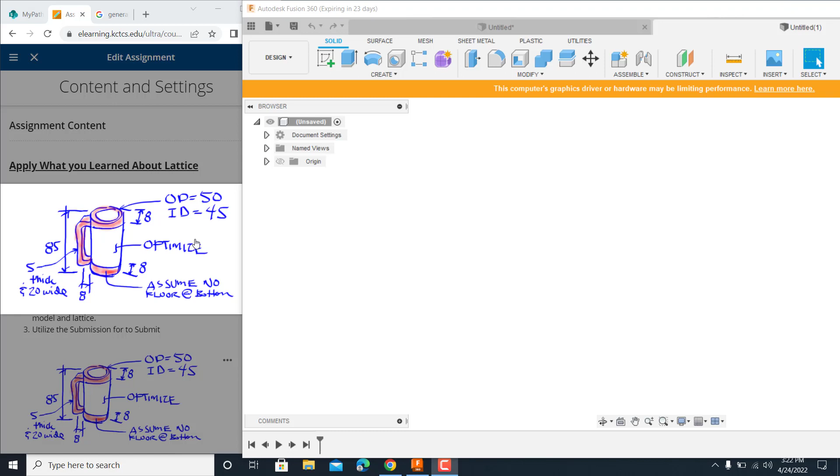Welcome back, everybody. In this lesson we are going to create this holder and design a lattice inside of it. First thing, we're going to make the holder, make this first and then we'll make the lattice as a separate component like we did in our previous lesson.

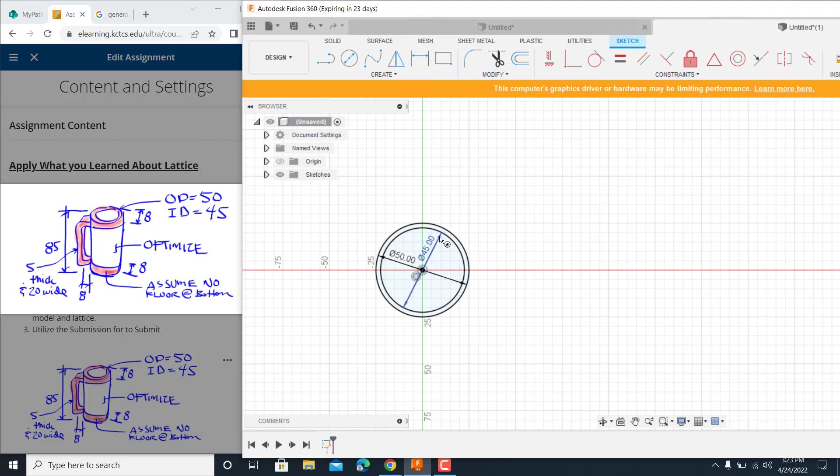So let's start this out. We'll do this video and then I'll make a video to show you how to do the lattice. There's a couple little tricks to that, but first thing I do is just start out, and this thing's 50 OD, outside diameter.

Inside of this thing is 45, so we'll get that in there, 45, and then finish the sketch out. I want to extrude this thing out, and looks like it's 8 millimeters. So we got that one done.

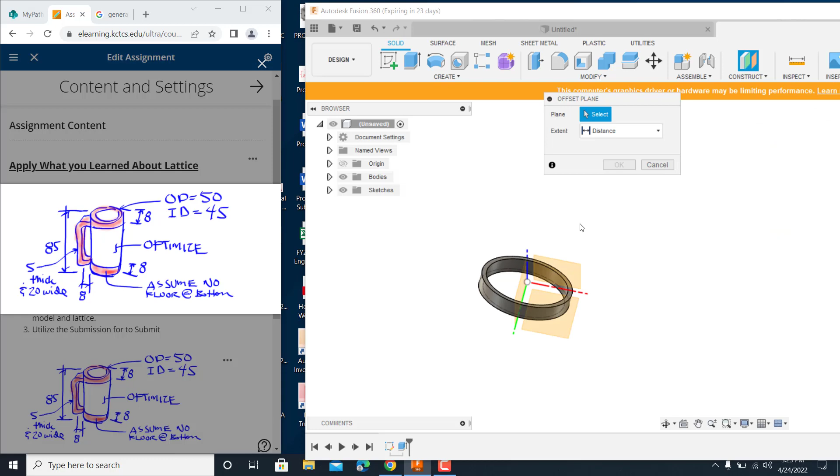Now I want to go ahead and make myself a plane up here. Construct, offset plane. I'll come up here and touch right on the face of that one. I'll go backwards, or I could have went forward, it doesn't matter. So from here, I need to go all the way from here, 85 from the top to the bottom. So whichever direction I'm going, minus 85 is it.

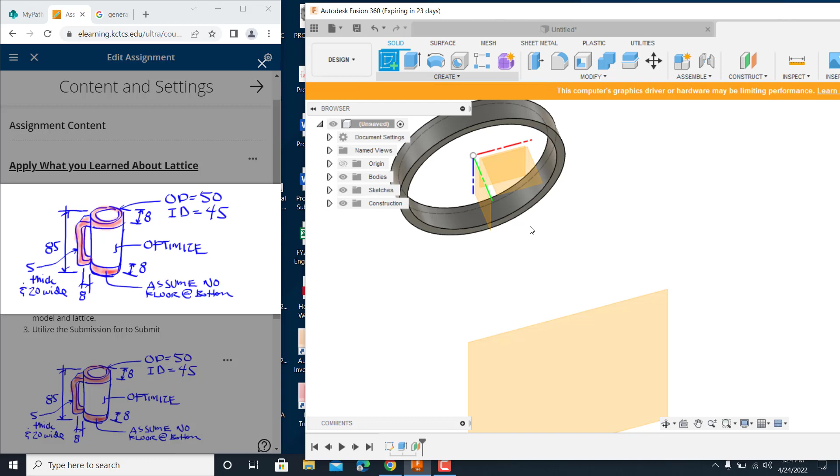Now I'm going to take and put this on that. I want to go to project geometry, catch that, and I should have caught both of them. And I hit OK on that. That was from here to here, so all I have to do is make sure that you understand where you're at, which side you need to extrude to. Right click.

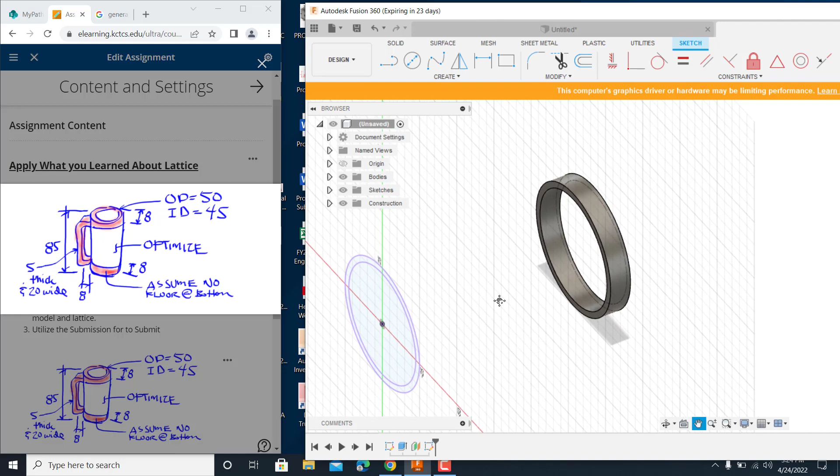I want to pull this over here, finish sketch, and come back in here, minimize that so we can see our drawing. Extrude this one back 8 millimeters as well. Just like that, we've got that put together.

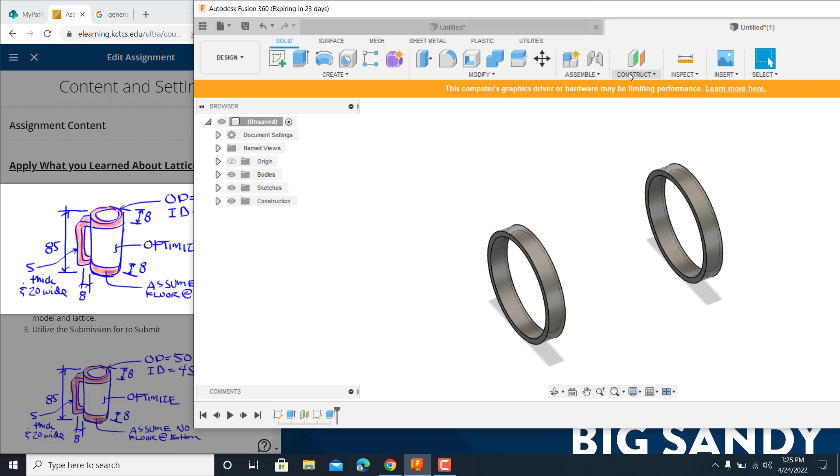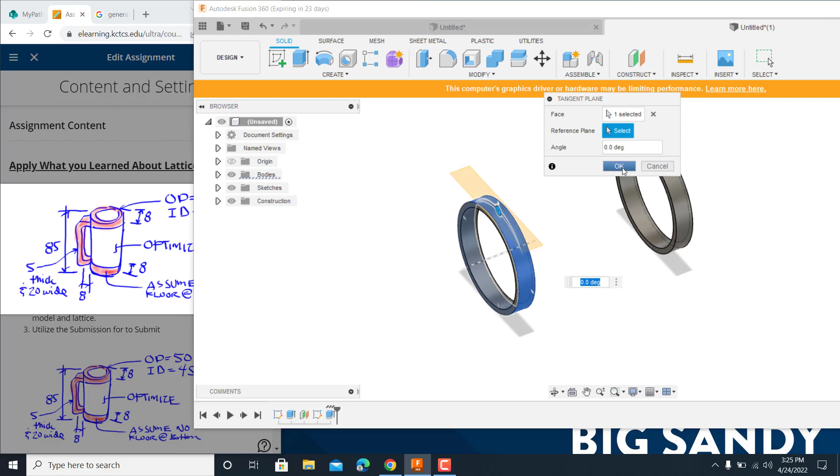Now I want to put this handle on here, and there's a couple ways that you can do that. This one's probably the easiest way, in my opinion. Construct, just do a basic offset. Pick the offset that you want to go toward. Construct, I want to do tangent plane, select face, and there we go. That looks better. I'm tangent right to the top of that.

That's perfect. Let's make a sketch here. Now I'm just going to go in there and put this. This thing is 20 wide, so I'm going to project this so I can grab a little bit of it. Project, grab that, and also that and that, so I have something to project to.

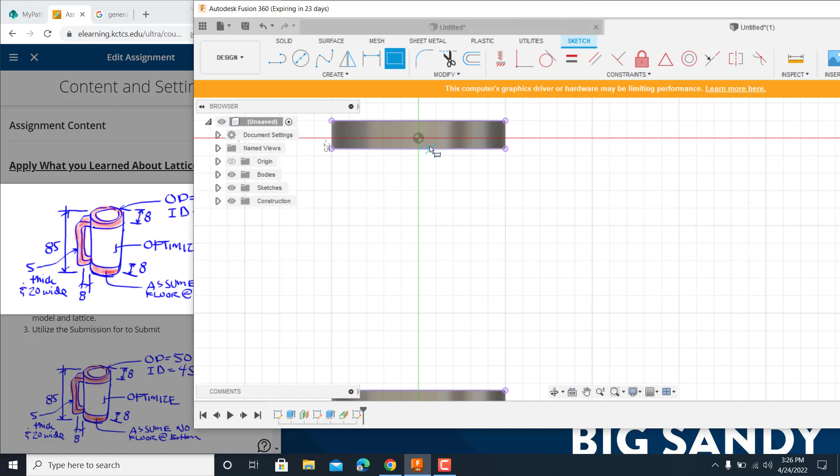I want to put now, I'm just going to real simple. This is going to be really, really simple. We could do it like this and come out. There's different ways, however you want to do it. I'm just going to do it real simple like this. Get that lined up.

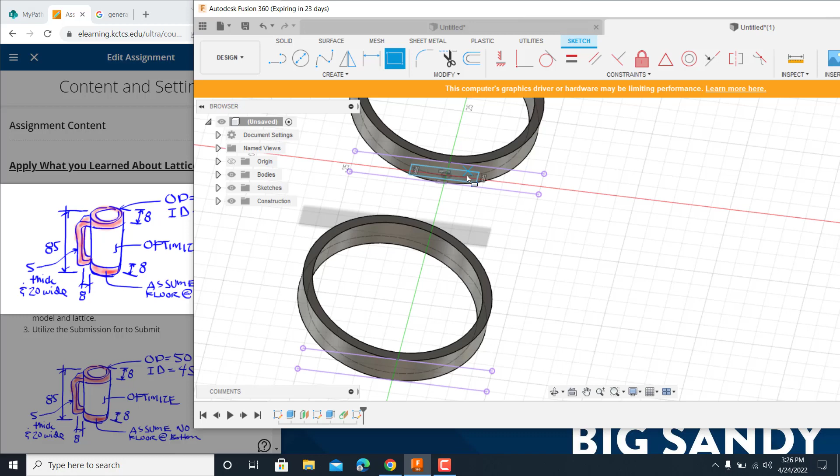Actually, there's one more thing that I need to do. I want to come off of that. I'm just going to show you that there's different ways that you can do this. I want to take and finish that sketch out. I like that. But you know what I want to do? I want to offset it back.

I should have probably done a side profile of it after I thought about it. Catch that. I want to come up and this thing is 8 millimeters, so 8 mil, boom. I'll start me a new sketch.

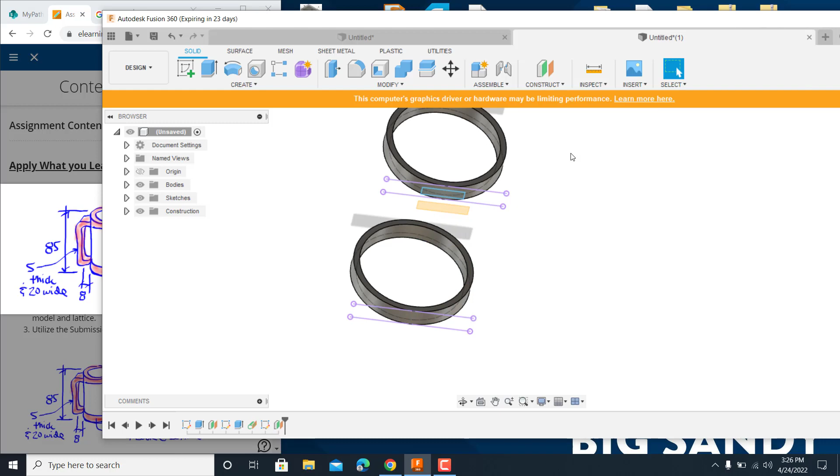I'm not going off that one at all, that sketch I had before, but come up here and I'll put me another rectangle in. And then I'll do some dimensioning on it. This thing should be, it says 20 wide, so from here to here would be, actually be 5. So it'll be 5 millimeters.

This overall distance is 8, so it will be 1.5 from top to bottom. If I can get it, so it's 1.5 and 1. That should make it right.

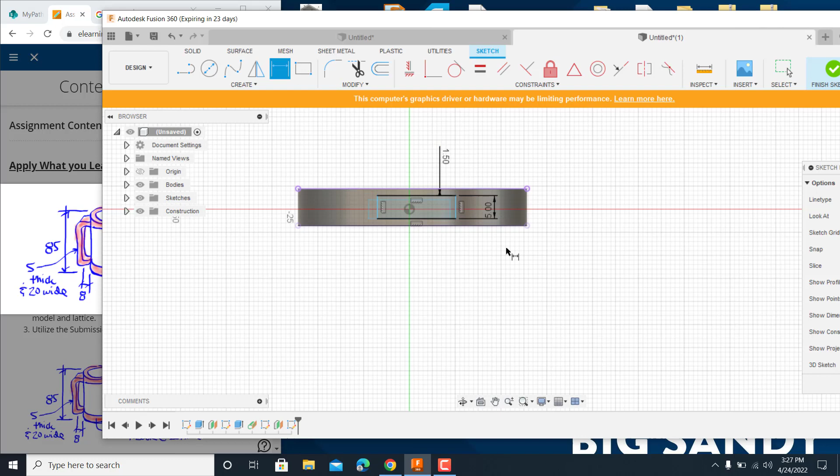Now let's dimension this thing from the center here over to there. This thing should be 25 across, will be 12.5 that way. And then I'll grab there to there, should be 25. We've got it, perfect. So we go down to the bottom one.

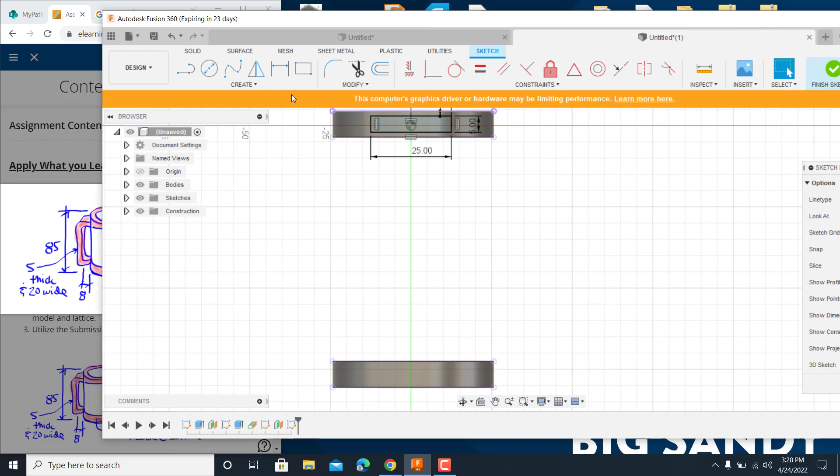We're going to take this same shape and come down here and do the same exact thing. We come down here, bring it across. This is going to be 25 across. We'll put this little guy in there like that, and it was 5. And of course this is 1.5. There it is. Finish my sketch out.

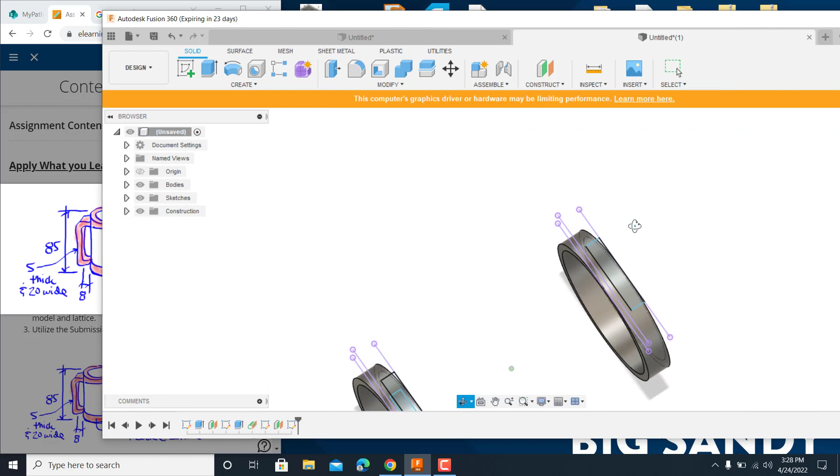Good, extrude that and that. And I'm not going to use distance. I'm going to go to object, click on that. And this one should be the same thing. Direction to object, and to object over here, and to object there.

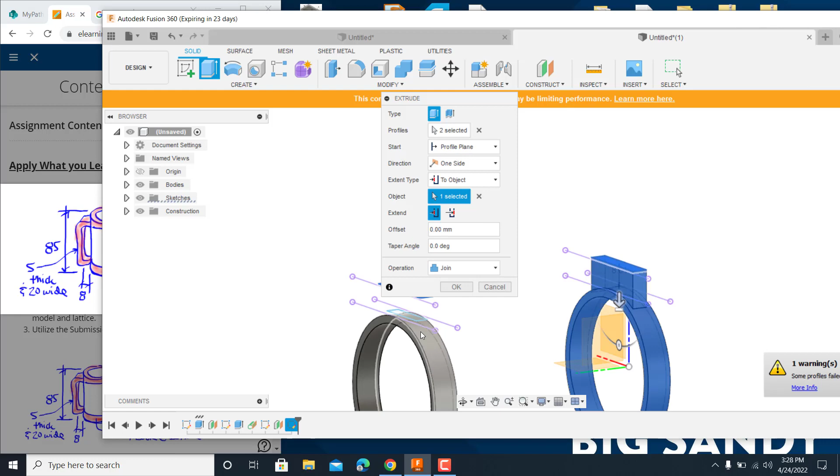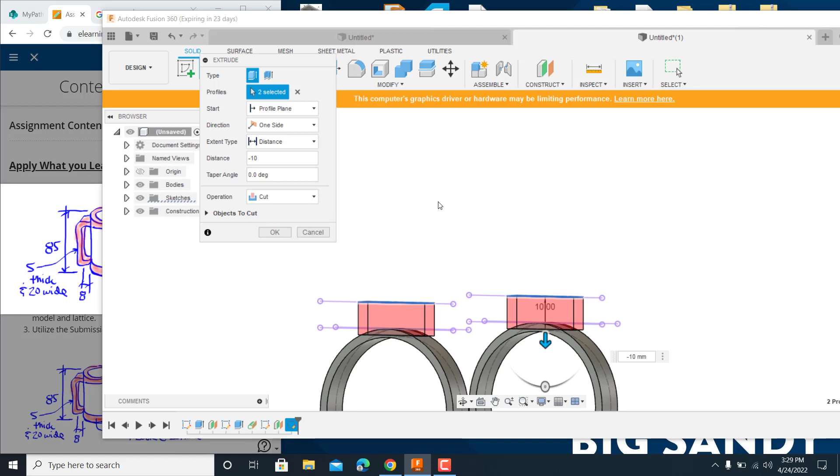If it's not wanting to let me do that just right, we'll eyeball it in. It doesn't matter to me, however it's wanting to work today. You want to actually cut into the part a little bit on this, because you want both sides to get in there. I'm going to pull this open just a fuzz so I can see it a little better. But you can actually grab that and pull it into the material just a little bit.

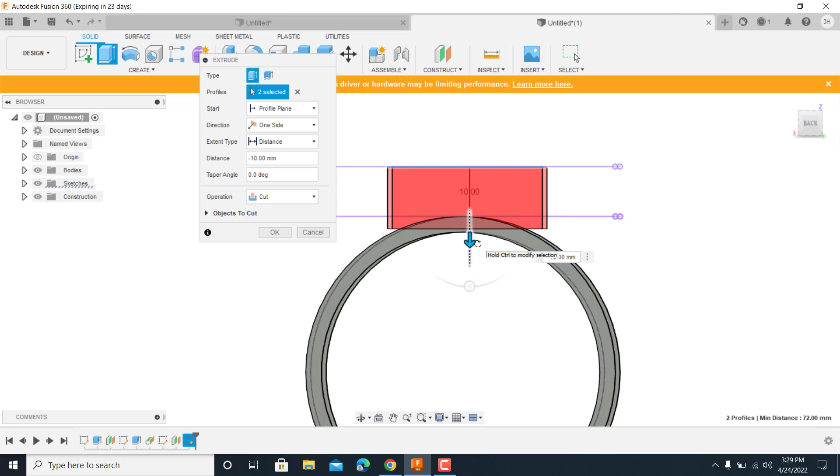We can actually go all the way through it. It doesn't matter, because in a sense we can just cut that out. It doesn't really make any difference.

And the final thing would be to put the top on it, and it would be real simple. Just put that square in there, from there and then down to there.

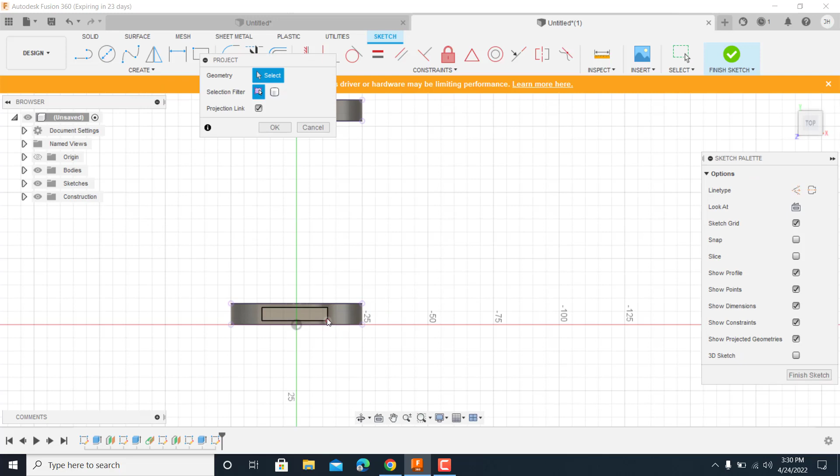It's not wanting to let me because I need to project my geometry out. You can go ahead and project geometry, I'm going to do that. Go up here and grab this and just go ahead and put that in. Project geometry where I should have. Catch that point right there is what I want. And y'all see what I'm doing wrong. I want y'all to see those mistakes I make so you can fix it.

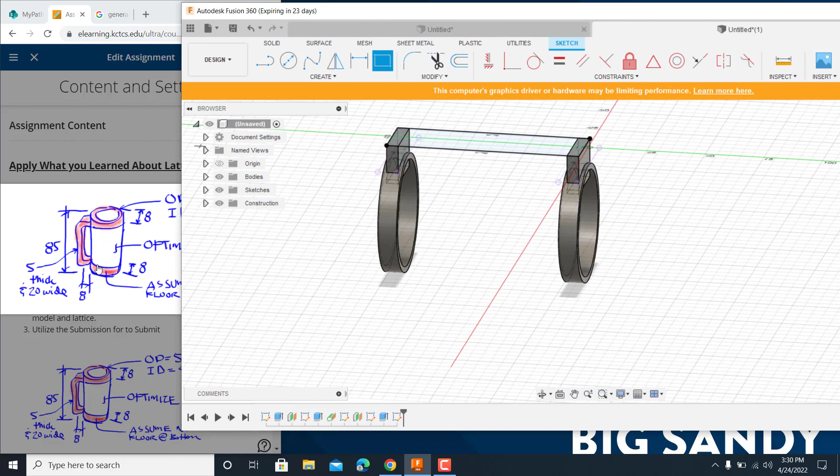And then I can go in there now and grab those points, rotate it around. Then I come up here to 8, let's look and see what that is wanting. It's 8. You're going to go to the outside of that, so just make sure you know which side you're going on. Finish the sketch, extrude out.

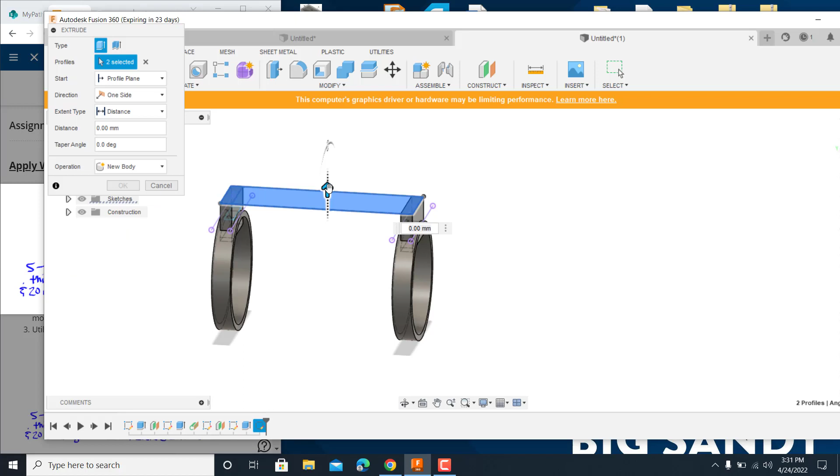Alright, all that looks good. And this thing is going to be 5 as well, so let's go 5. And you've got all that. It probably would have been easier with a side shot of it, you know, done a side profile, but yeah, just showing you there's many different ways.

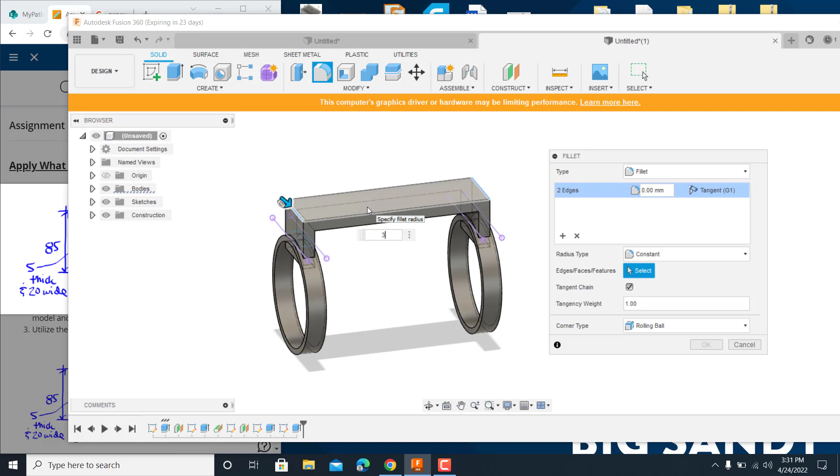And I want to put a fillet on this, this is just too square. Fillet, let's do a fillet of... let's see what 3 looks like. Not enough, let's do 5. 5 looks great.

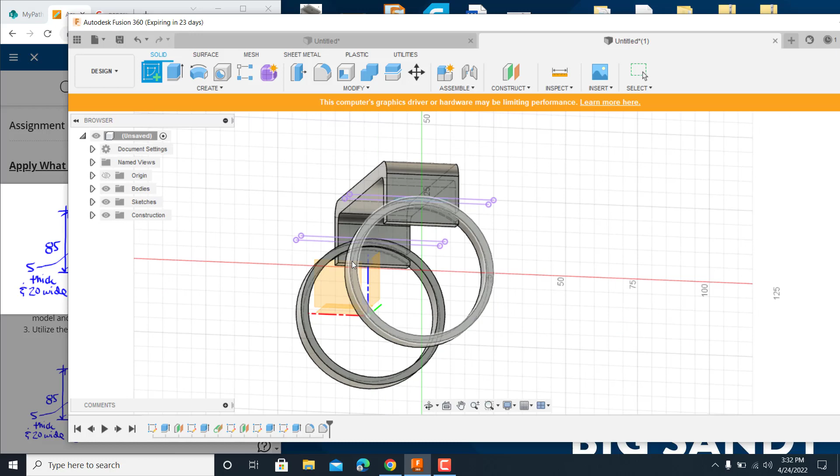Okay, we'll do another, we can do a fillet just to give it some extra strength inside here. We'll do like a 3, that would be okay. So there, that part is, and again we're just going to have to do another sketch right here on the face of this right here. And we're going to cut that junk right out of the middle of it, okay.

And we will finish the sketch out, and we're going to cut that all the way through, so it's nice and clean. Now you've got that shape right there. You're good.

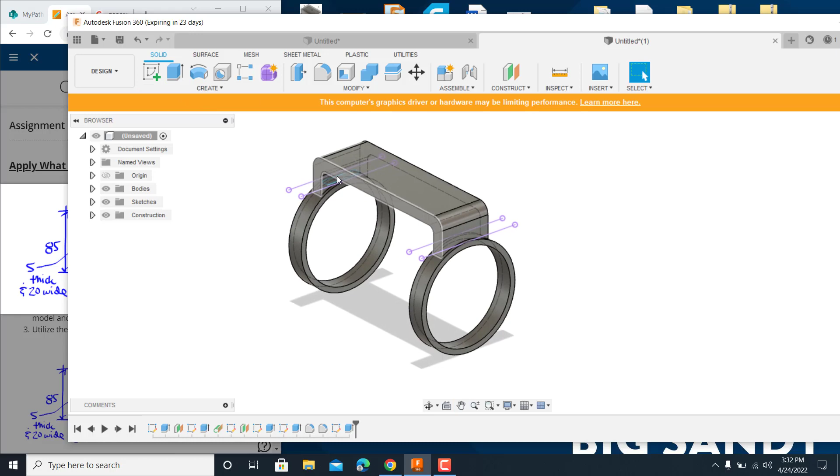Okay, so what you want to do is just like we did last time, make sure that you go ahead and save this part. Save it, but also you want to 3D print and save it as an STL file. Grab the whole part, should be one piece. Okay, and we'll save it in there.

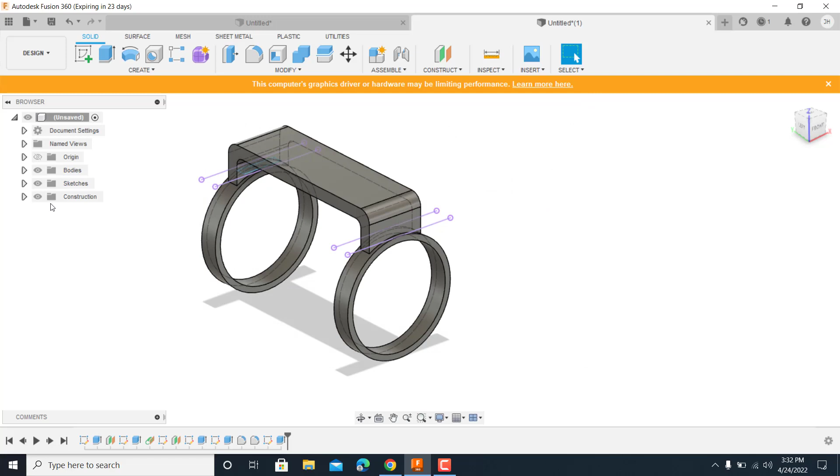That'd be fine, this will be the cup holder one. Save, that's good. Now, you'll notice the bodies, you just got one body, it's this whole thing. Now I want to put the area I want to do the lattice on, and this is real simple, yeah it's really simple.

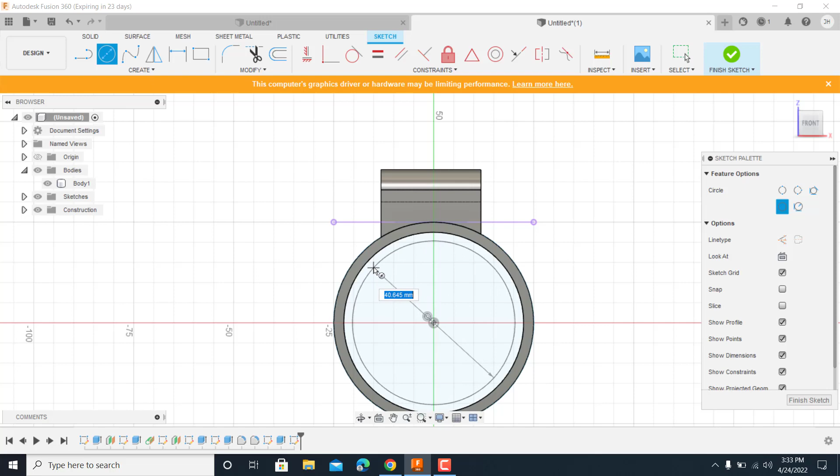Just grab new sketch, catch this part of it, and of course it's going to be the same exact. I could project the geometry or I can draw the geometry, it doesn't matter much on that part of it.

All we have to do now is finish the sketch up, extrude right there, and bring it all the way up until it touches this next part. This is a good part to use the 'to object' feature. Click right there.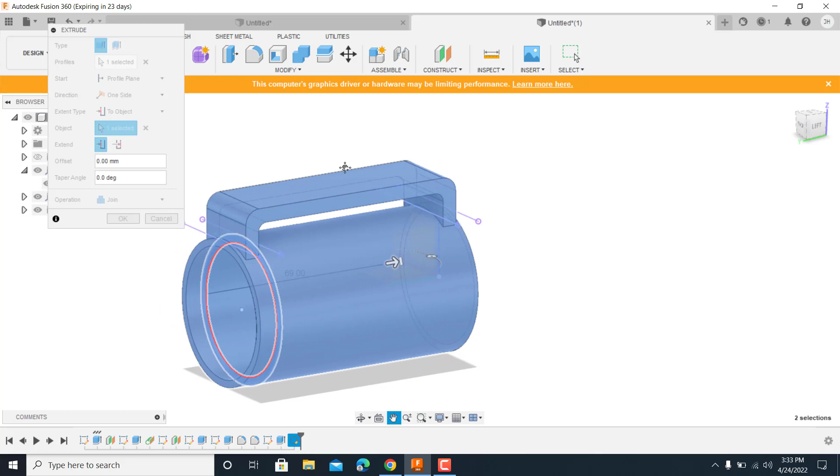But I don't want to join, I want to make a new body. You all see how it changes it? They're two separate entities, they're two different bodies. You're not joining them together in that Boolean type of situation.

So, okay on that. Now I need to save this one as an STL by itself. All you have to do is hide that first body. You got the next body here, done a body 3. It's odd, should have been body 2. But let's go ahead and save it.

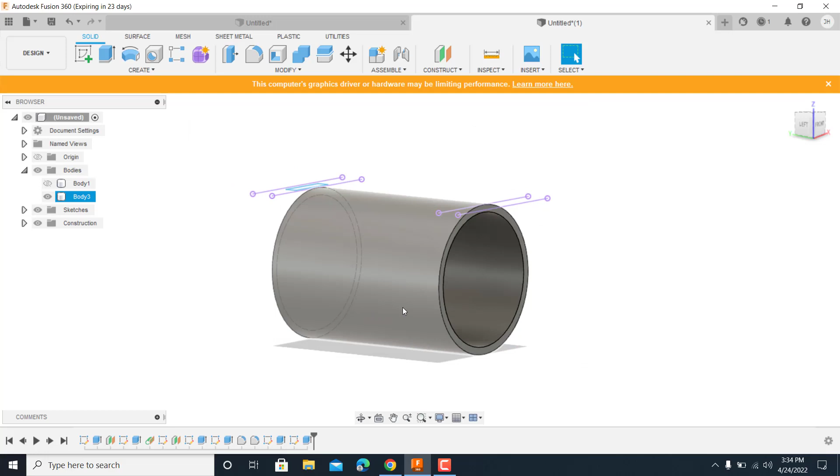Just go up here, go to 3D print, STL, select it. Everything looks good, and this would be the cup lattice body. Okay, so save that, and I shall make you another video to show you how to do the lattice structure on this cylinder. If you have any questions, let me know.